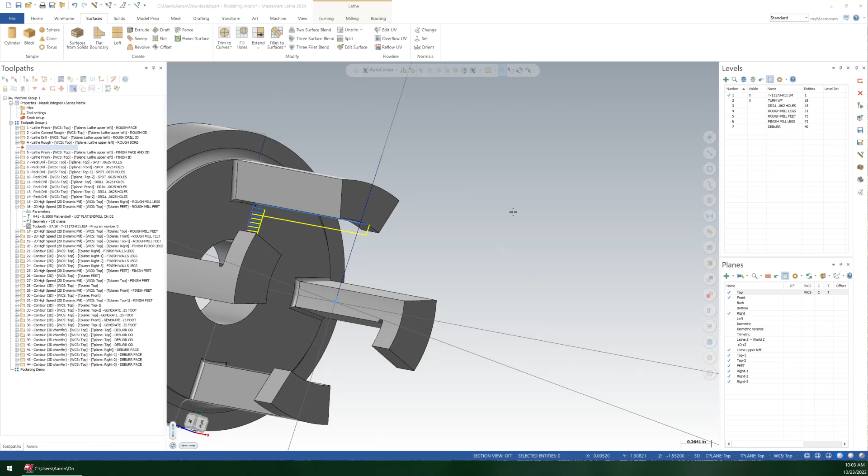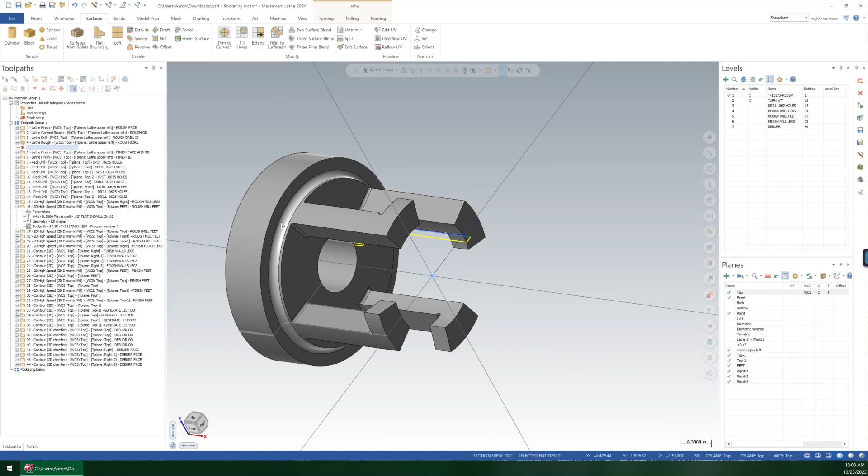They're looking for a way to rough out this part doing a dynamic style toolpath that will respect the walls and hook inside of here, and they're wondering how to do that. They do have the multi-axis package, which is very helpful in this case, so I would attack it by using the pocketing toolpath. Now, before we can do that, we are going to have to do a little bit of setup, and I'll explain why as we do it along. The main thing is that the pocketing toolpath needs a floor to be normal to.

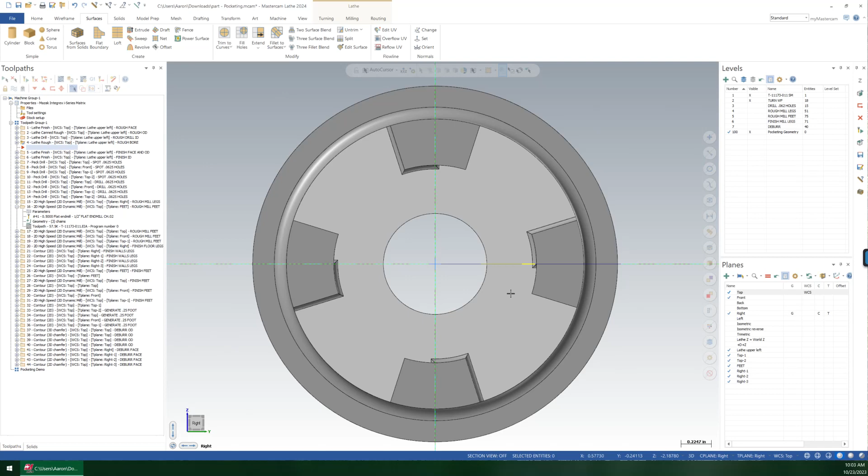So in that case, I'm going to make a circle out here to create a surface. So let's go to the right side view. I use the shortcut Alt-5. I'm going to make a new level, call it level 100, pocketing geometry. I want to draw this circle on the flat down here, so I'm just going to set my Z level down to there. I clicked on the Z down here, and then clicked on the circle that I wanted right there.

Let's go wireframe circle, and I want it to be smaller than the area, so I know that there's going to be stock removed to here, because I already looked at the lathe or the turning toolpaths to there. So I'm just going to put my floor down here. That'll bring the tip of the tool down to that side.

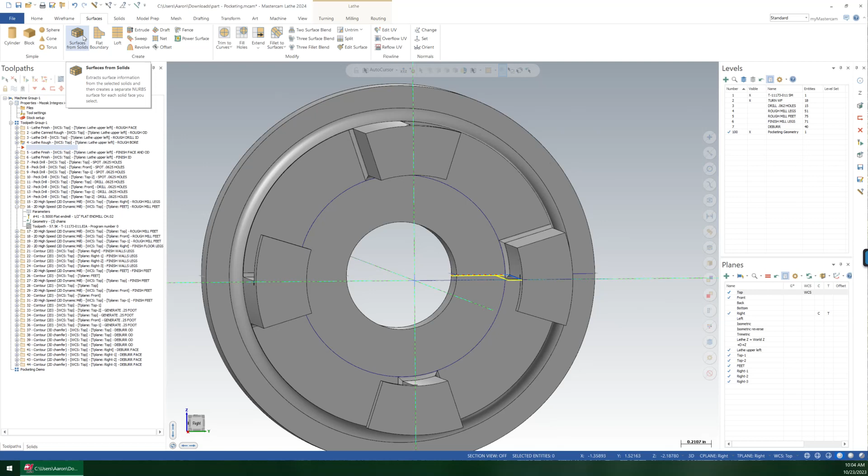So let's do that, and then I can go surfaces, and I could do it as a solid. It really wouldn't matter. So let's just do a solid extrude. Okay, and I'm just going to grab the arrow and snap it to the end there, so it's that long.

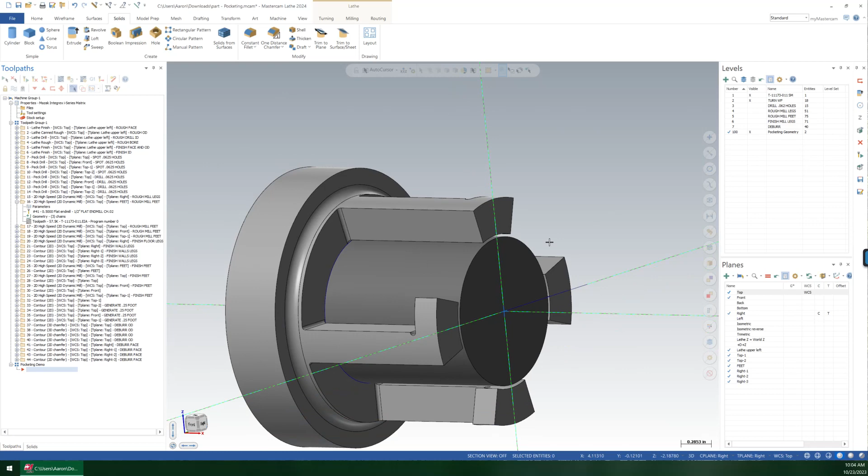Now the other thing with pocketing is it's a lot like Opti toolpaths, like the Mastercam dynamic roughing toolpaths, and the fact that it really needs stock. So I'm going to turn off my pocketing geometry level for a moment, and I'm going to create a stock model so the toolpath can reference that.

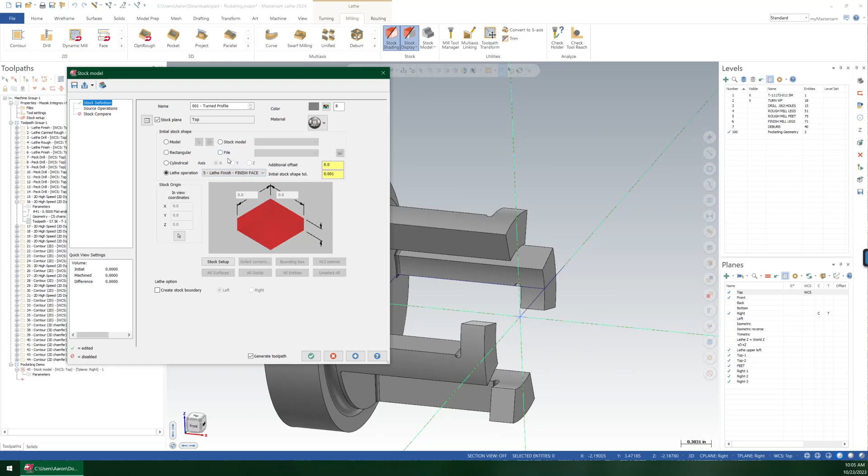I'm going to go to milling, stock model, and I'm going to give it a name, 001, turned profile. And we're going to say that it's done after a lathe operation, I think number 4 or 5. Let's see what this looks like. We'll do 5. I'm not going to choose any operations. I'm just going to hit OK. And there we go. So now we've got a stock model that is accurate to the part.

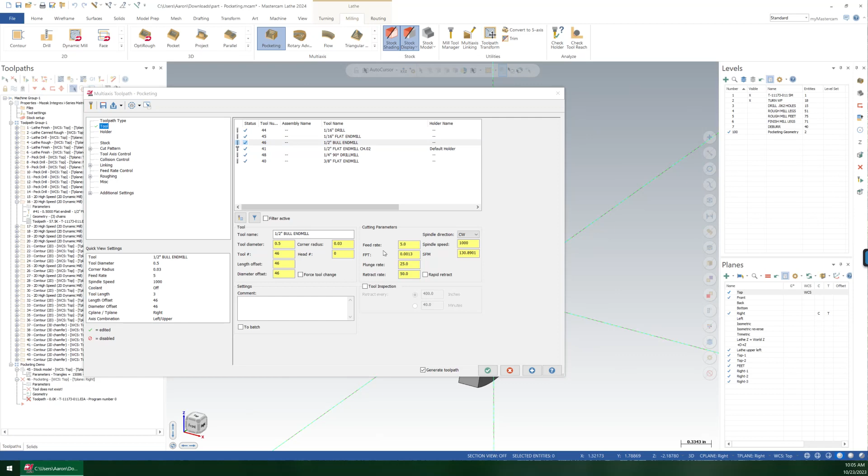Now I can finally go and create my pocketing toolpath. So I'm going to go milling, multi-axis, and I'm going to choose the pocketing toolpath. Now to start with, I haven't gone through and edited this guy's tools or feeds or speeds or anything. I'm not going to bother with that. All I care about at this point is the toolpath itself.

But one thing to note is that it is holder aware. So if you have a real holder or a real issue, make sure that's defined properly. But I'm going to skip that, go directly to my stock page. So I need to tell it that I want to look at a stock model, and I'm going to reference the stock model that I made.

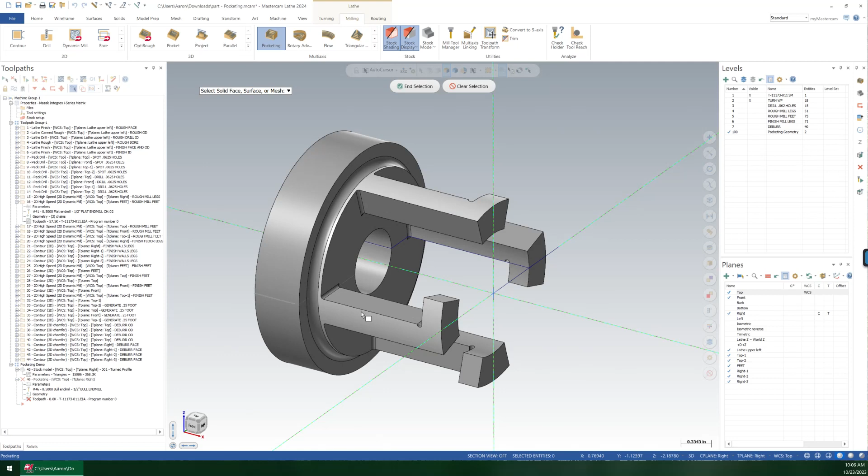Cut pattern. So the way these things work is you need to point them to the machining geometry. So in that case, that's this entire part. I could come through here and click this, click that, try and create all these, but it doesn't matter. The stock only exists where I need to remove material. So I'm just going to triple click. There we go. Select that entire solid.

All right, and then the floor geometry, I can turn on my level over here and just say I want to be pointing down to that. Great. Other than that, I'm just going to say, 5 thou, stock to leave, maybe 10 thou, whatever.

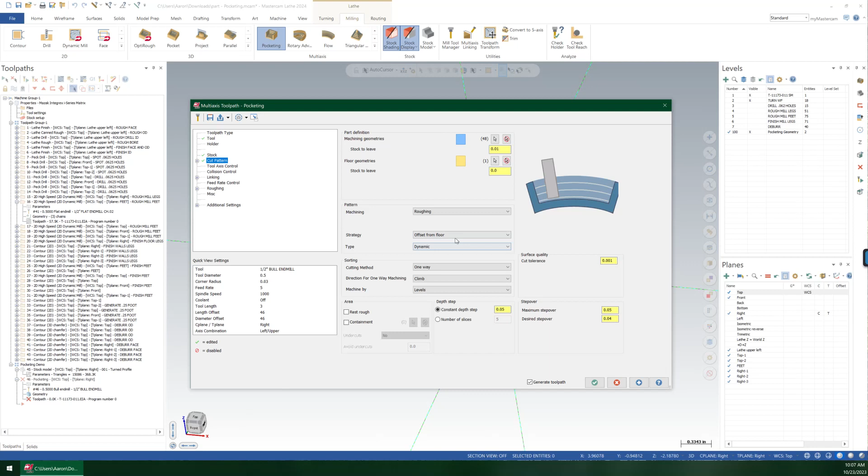Strategy, just leave it on roughing, offsetting from the floor, dynamic toolpath, sure. I'm going to tell it that I only want one slice down here at the depth step. And my cut tolerance, I've got 10 thou up there, which means I could probably do maybe 2.5 thou cut tolerance to loosen it up.

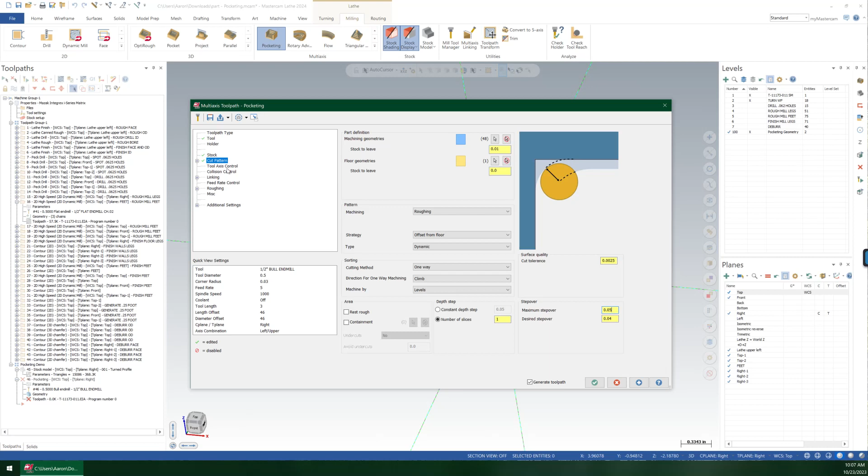Maximum step over, of course, you would want to set this to a true dynamic step over amount. I'm just going to leave it at 50 thou because that's good enough for me. We don't have to adjust anything on tool axis control or collision control. Again, depending on the length of your tools, you do have to pay attention to how much material it's leaving around the shoulder, the shank, and the holder.

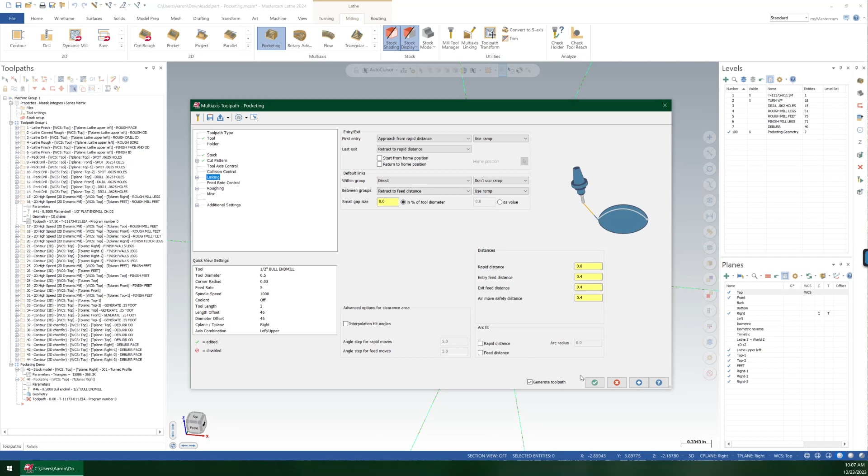Make sure they're properly defined. I'm going to see what my defaults give me for linking, so I'm not going to mess with any of that stuff. Let's just hit the green check and generate this toolpath. And we can go under View, Multi-Threading Manager. Oops, well, I didn't get it up in time, but it popped up on my other screen.

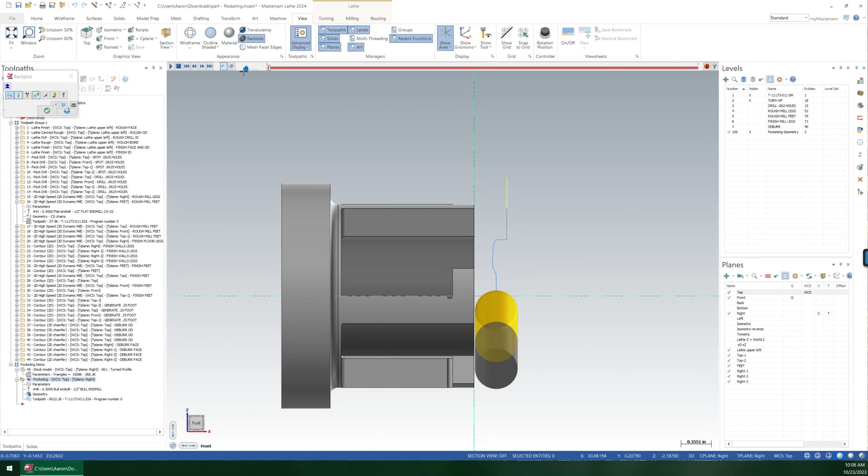All right, so let's take a look at this toolpath. As you see, this thing's coming in. I'm just going to slow it down a little bit and hit play. There we go, and that's pretty much the motion that we wanted.

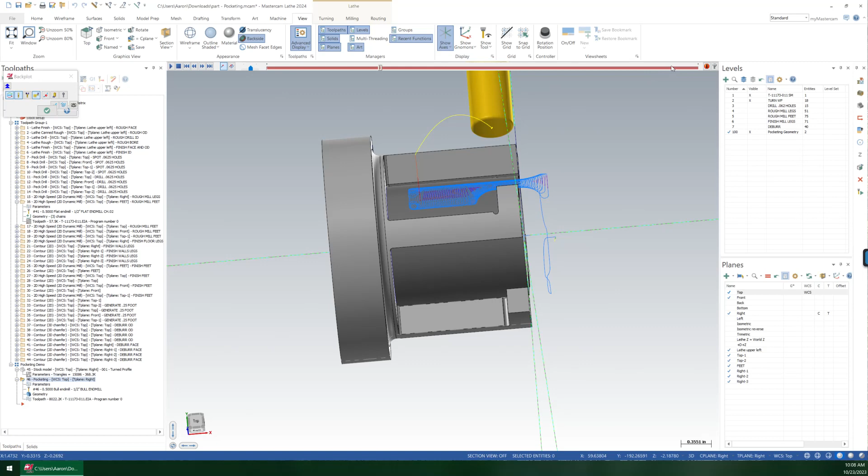We wanted that dynamic roughing motion around all four of these things. I'm just going to hit stop, jump to the very end. Stop jumping around. Backplot, sit, backplot, sit. Good backplot.

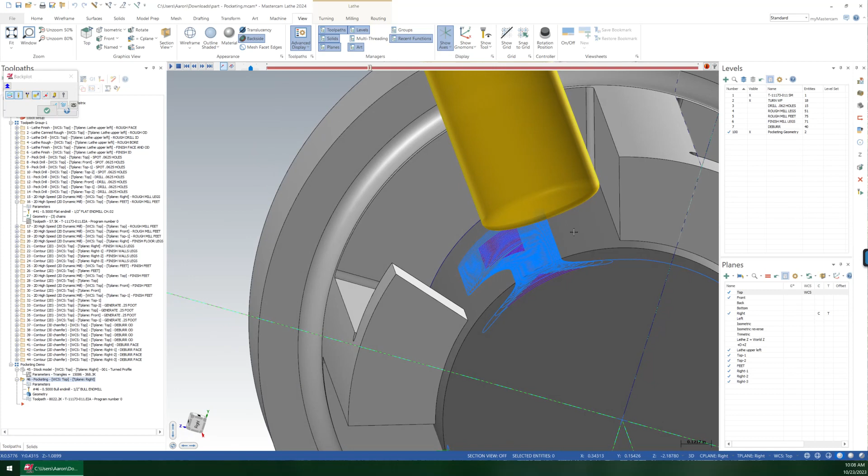All right, so overall looks pretty good. But if you go and you investigate it close, you're going to notice that there's some material left, probably where you wouldn't expect it. So let's take a look at what's actually happening here. I'm going to go to my side view, Alt 5 again, the right plane. And you'll notice that you're leaving a decent bit of material here.

Well, why is that? Because the way that this toolpath works, it's always pointing directly at the bottom normal of the surface. So whatever your floor is, that's where this toolpath is pointing in this case. The center middle of the tool here is pointing here, which means that it's not curving over where you would want it. So there's a couple of things you can do about that.

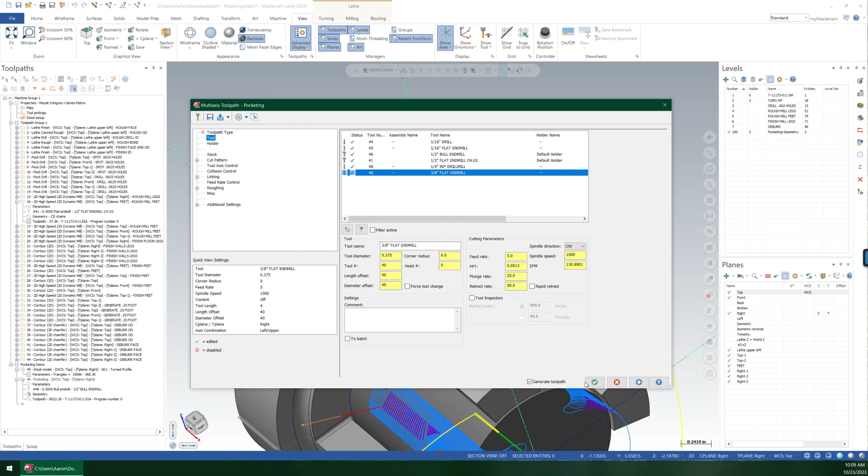The number one easiest thing to do is to just simply switch to a smaller tool if that's an option, and it doesn't take too big of a feed rate hit. So for example, there's a 3/8 flat end mill. Let's just generate the toolpath with that. I'm not going to change anything here, but you get the idea.

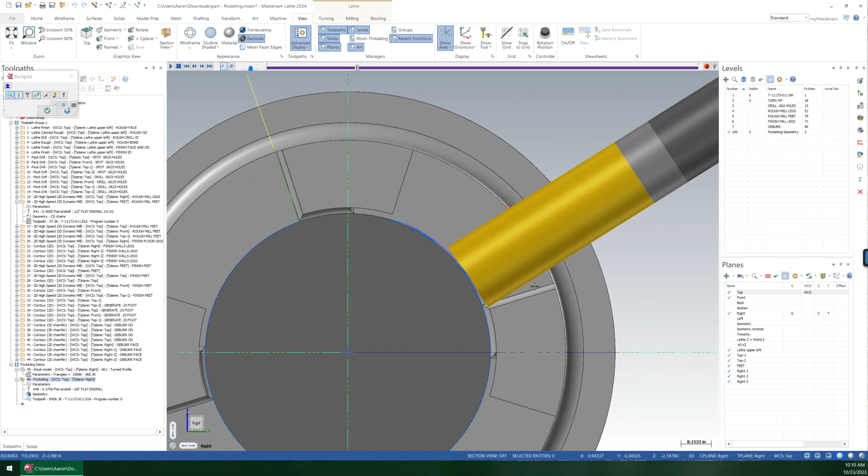Right, so now if we look at that toolpath, same thing, let's just go over. You'll see that because the center of the tool is closer to the edge, it is a better fit. But this still might not be good enough. Your best bet here would probably be to come in and do a couple of swarf passes. But let's see if we can get a slightly better toolpath.

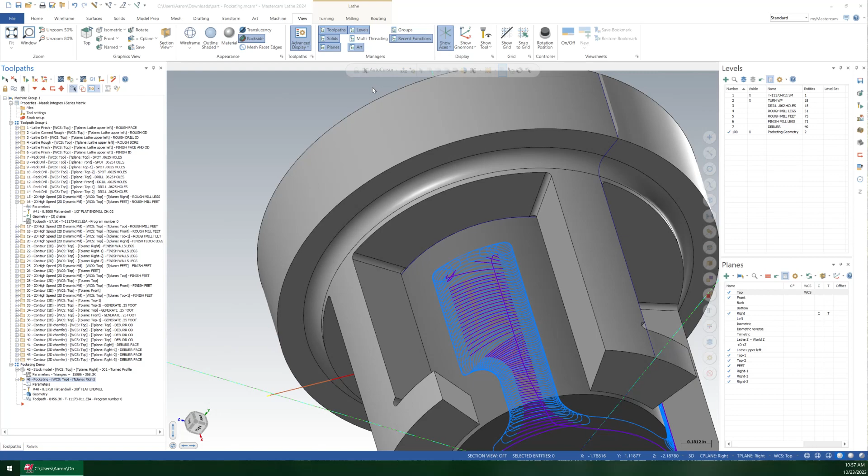So the way to solve this, obviously, part of the problem is that we're using too large of a tool to really rough this out. I mean, it's fine for roughing, but the actual size of the radiuses over here are significantly smaller, right? So I think the best way to rough this out would be to go and make a stock model off of what we've done here, and then use that to drive a smaller toolpath, or a smaller tool, I'm sorry.

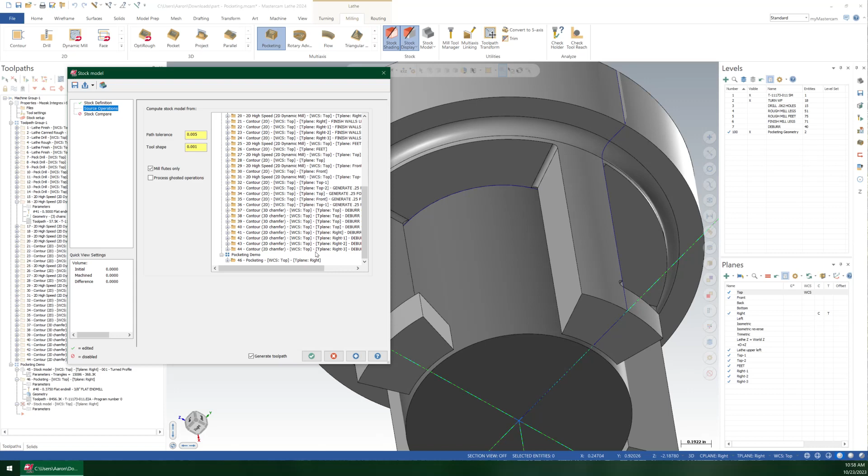So I'm just going to go milling, stock model, and give this a name, 002 after initial roughing, or we can call it after 0.5 roughing. We're going to start with that original turned profile, and this time though I am going to choose my pocketing operation, and there we go. Let's go check and see what's happening. All right, my fans are spinning up, so this is probably going to take a moment, so I'm just going to pause it.

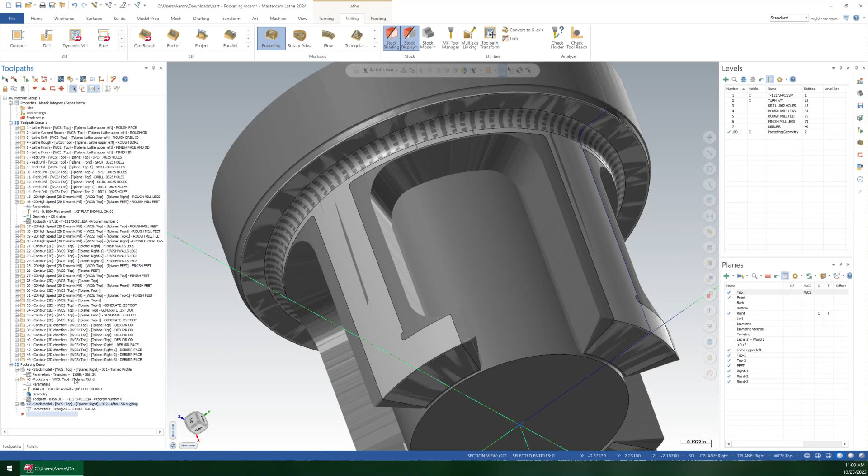Okay, so that just finished up, and you can see the material left. So what we need to do now is just copy this toolpath, copy paste, and we're going to point it out there.

But real quick, let's just do a quick analyze. Let's see here, what's the size on these? So you can see these are 60 thou, so we'll have to come in with maybe a 1/16 cutter to just clear out the corners.

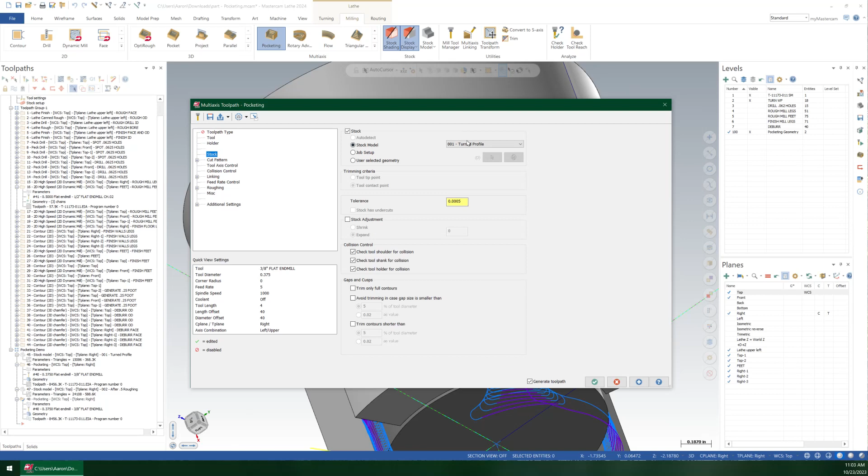So I'm just going to change the toolpath, jump me right to the stock page, which is handy because I need to point it to this stock instead. And I'm just going to change my tool.

Again, I don't particularly care about feed, speeds, whatever, but I will dial back my step over because 50 thou step over on a 60 thou tool is a little aggressive. Maybe we could do like a 5 thou step over. The other thing I'm going to do is tell it to dial that back and leave maybe 2 thou on the walls.

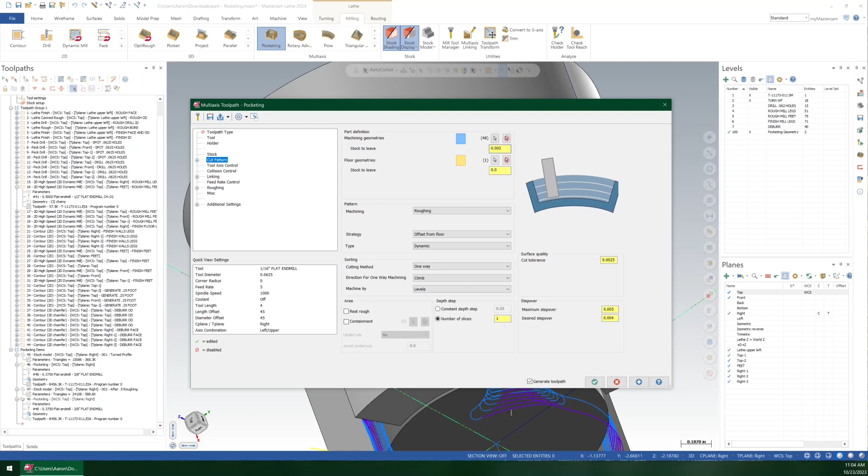All right. And Alt-M will bring up our multi-threading manager. And oh, looks like it's already done. Okay, no sense in pausing the video. So let's take a look at how this thing's working.

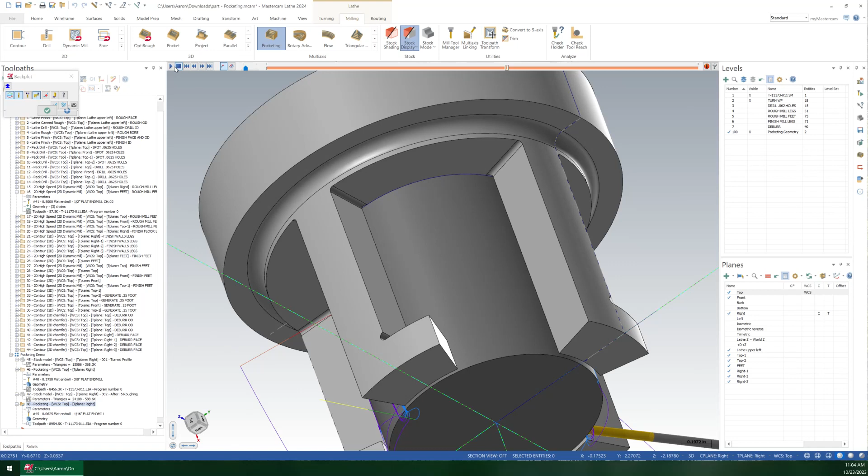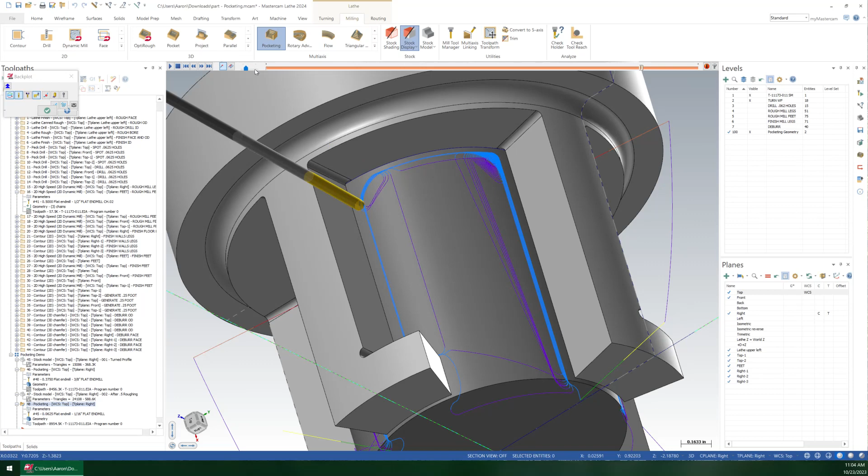So we'll just play through here real quick. Sorry, thought I was a little closer there. There we go. So you see, this is going to act like a dynamic toolpath. So we're clearing out in the corners. Very nice. So wherever there's extra material, it is going to approach that in the appropriate fashion.

So let me just stop this real quick, and I'm going to take a look, and you'll see that it's still not exactly cleaning up the edges, but it is leaving significantly less material.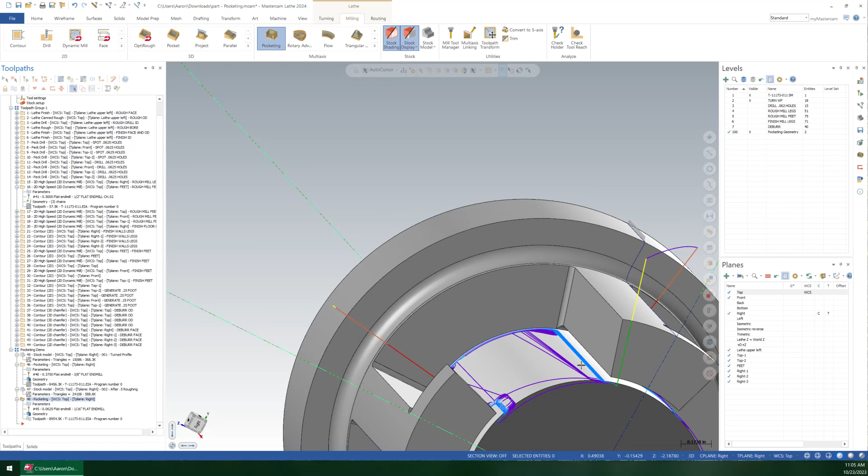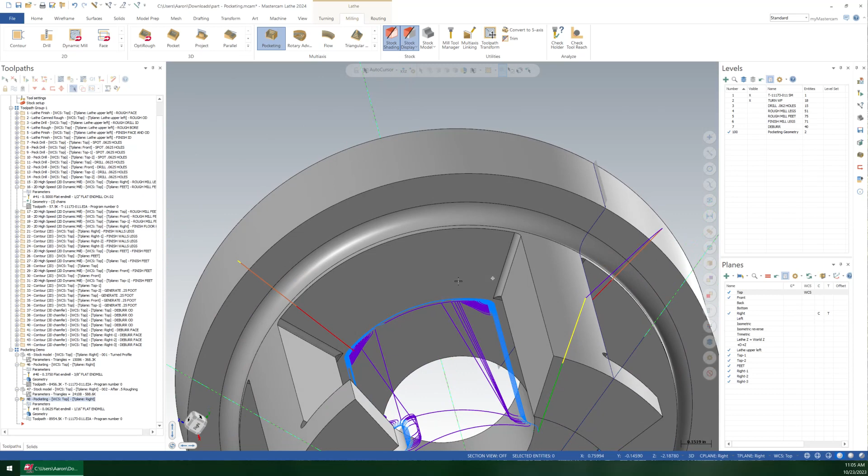So I think the last thing to do then would just be to do a swarf toolpath on this. So how I do it is, the problem that we have is we need a wall surface because you want it to come in, cut around, and all the way back. But if you try and feed it this big floor back here, it's going to have trouble figuring out exactly what you mean. Now you could create curves, which would be fine.

Or the other thing you could do is split the model, so that way each of these has its own wall segment. Now, either one's valid. I'm going to split the model, especially because I already have this chain that I made back when I did this solid right there.

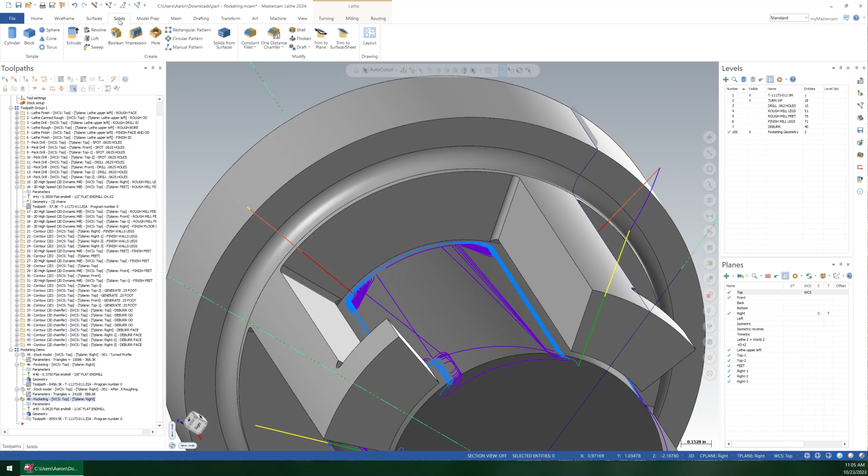So I can come up here and do a model prep. I'm going to split solid face. I'm going to choose just this floor right here. And then I'm going to choose a wireframe entity to split it at, which is that wireframe that I made for that solid. Okay, and selection, and good.

So let me turn this off. Yep, see, all that's good.

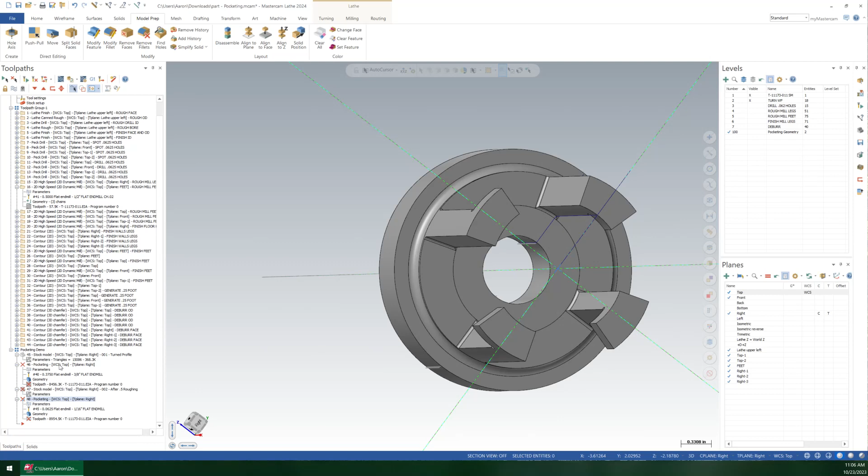Now, it is going to need to regenerate the pocketing toolpaths. So if you knew about it ahead of time, you could definitely do that up front. You could also, of course, make a copy of the geometry, whatever, but I'm just going to come in here and put a swarf milling toolpath on this.

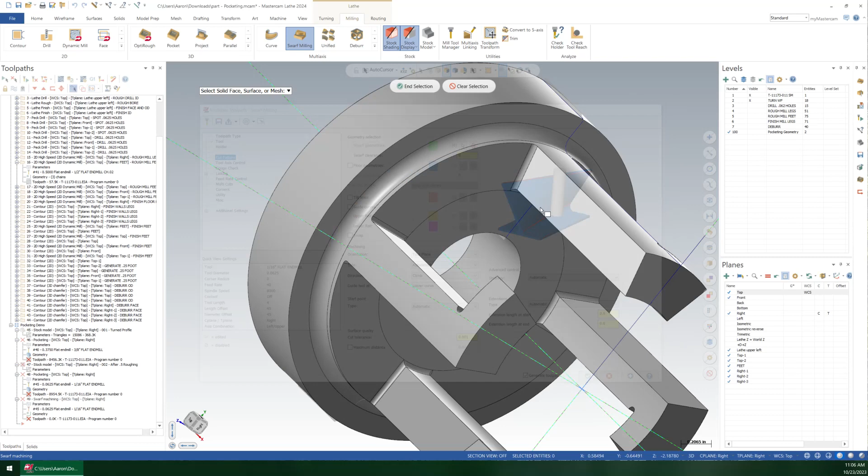So again, you're going to have to do that with your 1/16 to even get close to that corner radius. You're obviously going to need a smaller tool yet to actually machine that because these guys are, in fact, tiny. But let's just see what we get generating that toolpath.

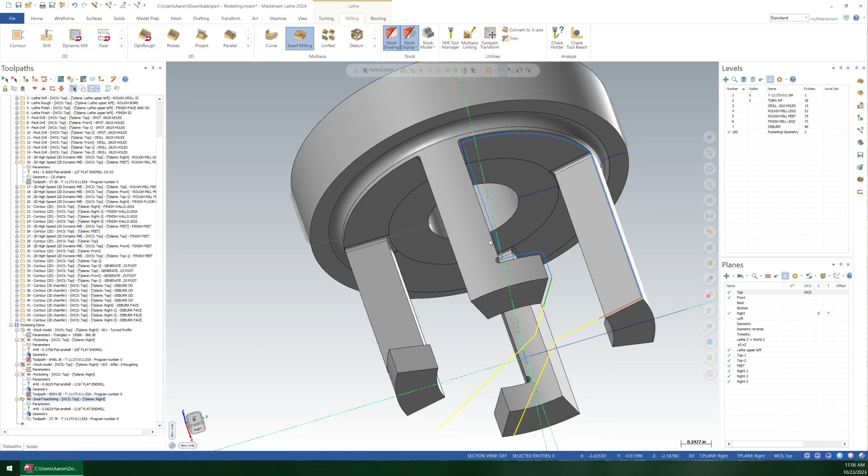Oops, all right, so it guessed incorrectly. You see it guessed that you wanted that. No problem, we'll just flip those chains. So come back into the parameters, and we're just going to say swap the top and bottom.

So that'll get you a much closer finish. Obviously, you can tweak and change this, but I hope that helps. Thanks for watching.